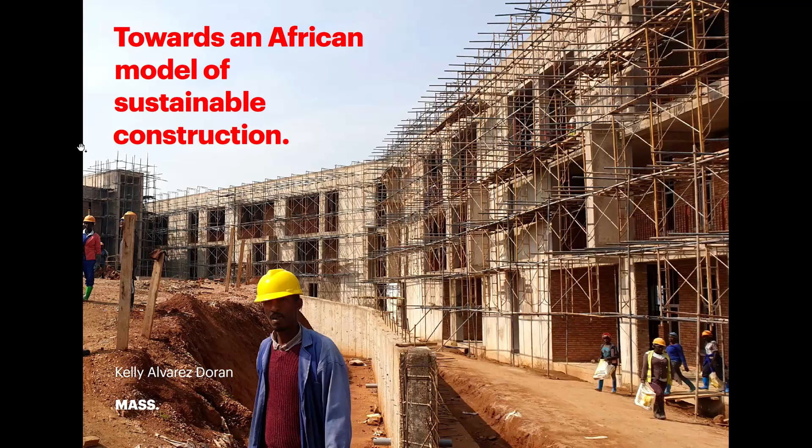Thank you. Just to fill the time, so I'm an architect with Mass Design Group. We're a group of architects and engineers. I think we're, as a discipline, as a construction industry, at a pivotal point in human history. It's fair to say our discipline has a disproportionate impact on the world and our climate through the built environment. Hopefully we can deal with this technicality here.

From the United Nations, this came out just over a year ago: the IPCC looking at this 10-year window we have to halve our emissions as human beings on this planet to make it livable for our children. Never mind this aspiration for zero 30 years down the road in 2050. And for me, this is an existential question, not just for us as humanity, but specifically for us in the construction industry, to be very specific about what it is we're talking about.

Half of what? As a discipline, as an industry, we're responsible for 40% of emissions on this planet. Of that, roughly 30% are related to the operations of the building stock that surround us, that we occupy. And every year, we're adding another 10% of emissions through construction, through the embodied processes of our actions.

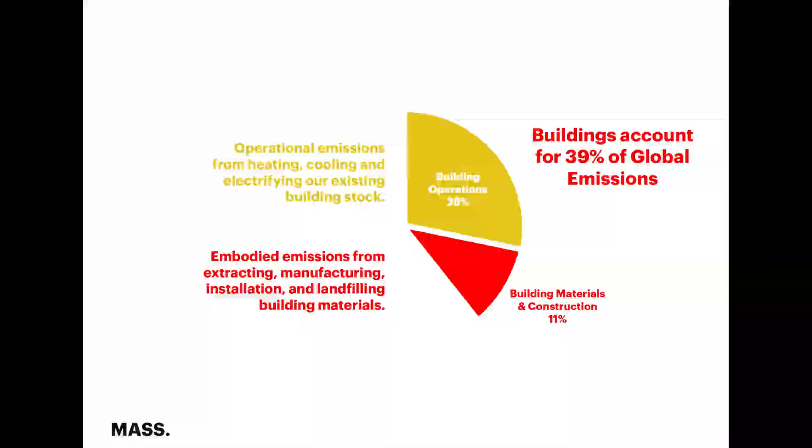And when you look at these two things, by and large, the discipline and the rubric of sustainability has been focused on operational emissions: energy efficiency, heating and cooling, how to reduce our utility bills. Very little in comparison has been focused on the embodied emissions of the process of construction itself. What's in our materials? Where do they come from? What are the emissions related to them?

So this question of half is profound when you think about it. It is the question, I think, of our time. How do we halve the current emissions of our existing building stock, but more importantly, how do we halve the embodied emissions of everything we build from today? This requires a complete systematic rethinking about what it means to be an architect, an engineer, a builder, a developer.

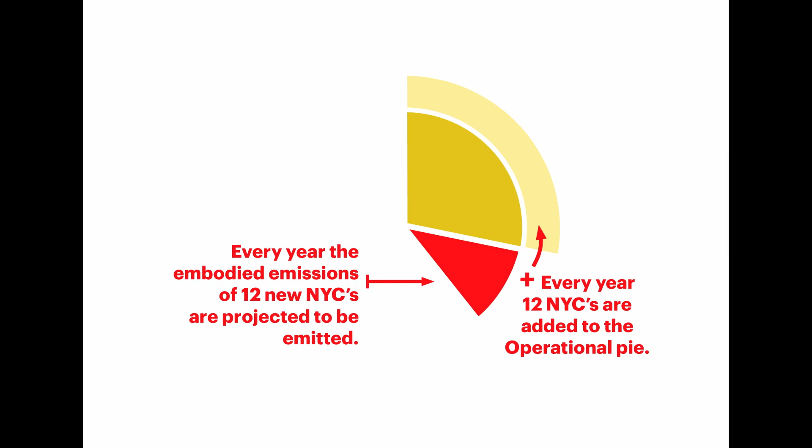Based on the projections from the United Nations for future growth, we are building the equivalent of a New York City every month on this planet. And that is all 5 boroughs, not Manhattan. That much floor area is being built on the planet monthly. So every year, we're building 12 new New York Cities, and that means we're putting 12 New York Cities into the operational part of this pie as well. So it's going to get bigger.

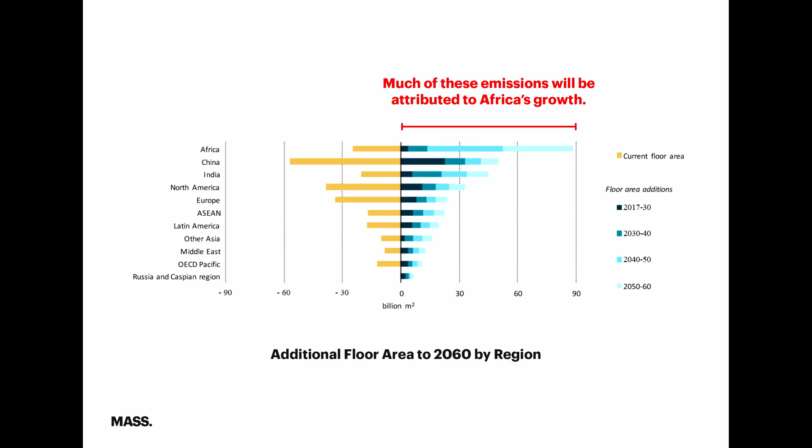As an architect who's been practicing mostly in Africa over the last 5 years, the projections are that this floor area is disproportionately going to happen in the developing context, and a lot of it in Africa. We started 12 years ago in Rwanda. It stands for a model of architecture that serves society. We're a nonprofit of about 130 architects, engineers, filmmakers, from about 14 different countries. We started with the Butaro Hospital in Rwanda, done through a partnership with the Ministry of Health and Partners in Health.

Out of that, we started a fledgling office in Kigali, Rwanda, and in Boston, Massachusetts, and got a couple projects on the back of this hospital. 10 years later, we now have 6 offices across the world. A lot of our work has been in developing settings, a lot in Africa and Southeast Asia, but increasingly we're seeing our model of practice take root in North America and the United States specifically.

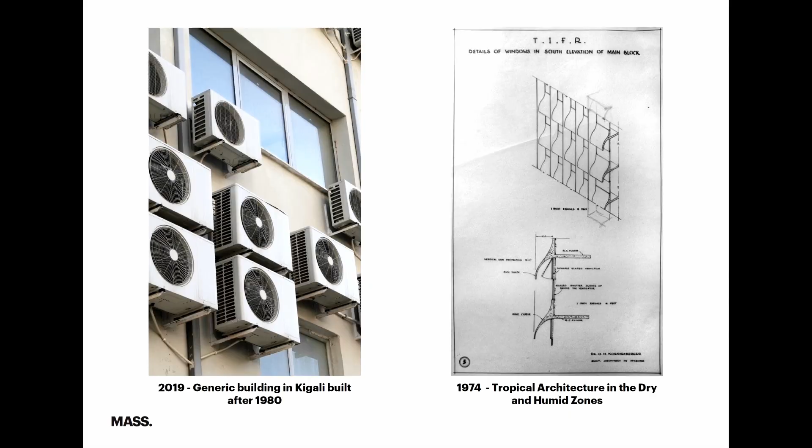So the first is the obvious one, the operational emissions. How do we halve the emissions of a building? This is Kigali, Rwanda. This is a stand-in for most African cities in a way, rapidly growing, a lot of foreign investment and construction, some of it fairly dubious, most of it looking like this image on the left. By and large, a model of architecture that's reliant on mechanical systems. And I think this is not just Rwanda, this is writ large the world. There's not a window in this building open since I've been here, for instance.

On the right, 40 years ago, the Department of Tropical Architecture at the AA in London put out extensive research around design for passive systems for tropical climates, which Kigali is right in, which is how you design a building for orientation and ventilation. I noticed this building over here was thinking about it, which is nice to see.

This basic back to first principles we brought to our first project, this hospital in rural Rwanda, no electricity when we got there, rolling brownouts from even the generator it had, hard to get fuel there, et cetera. How do you design a hospital in a context where electricity is not a given? And so we're back to looking at passive ventilation and the obvious things we know intrinsically. This is intrinsically good design.

Access to views, invert the bed. Every patient has a view of the landscape. Windows open in a hospital, mind-blowing. Cross ventilation, stack effect, all the things that are really core principles of good design that we've largely forgotten in healthcare, or in any typology necessarily.

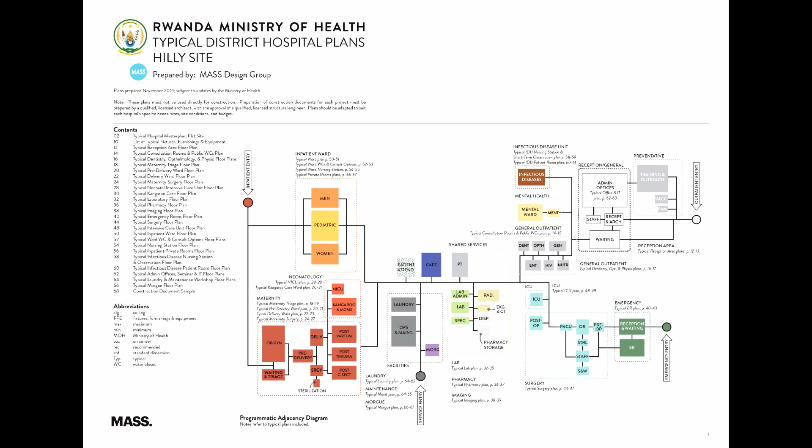But on the back end of the success of this, the Ministry of Health of Rwanda said, great, fantastic job on this hospital. We need like 29 more of them. Can you help us? And so we said, okay, let's work on a template, a set of standards that we can then use for all the different hospitals around the country. So we did these typical plans.

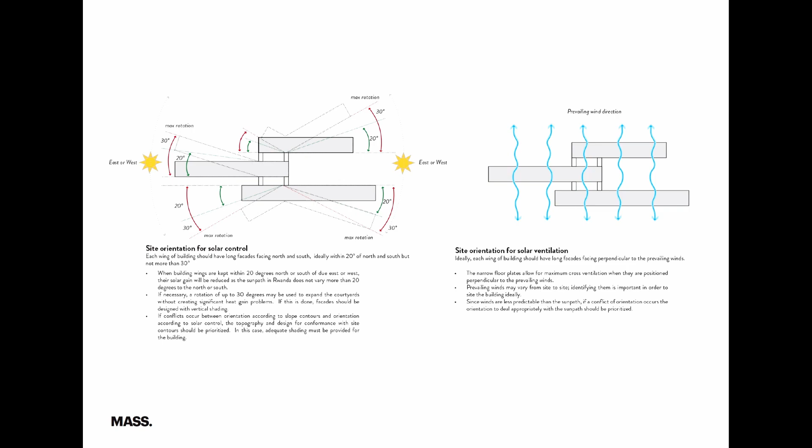And the design of this document was really for their procurement department, the people in their infrastructure team, to evaluate designs that were incoming, to look at their own buildings, to kind of build a basic assessment of environmental design, orientation, ventilation, solar exposure, et cetera, looking at how to get the air changes you need in a ward for making sure

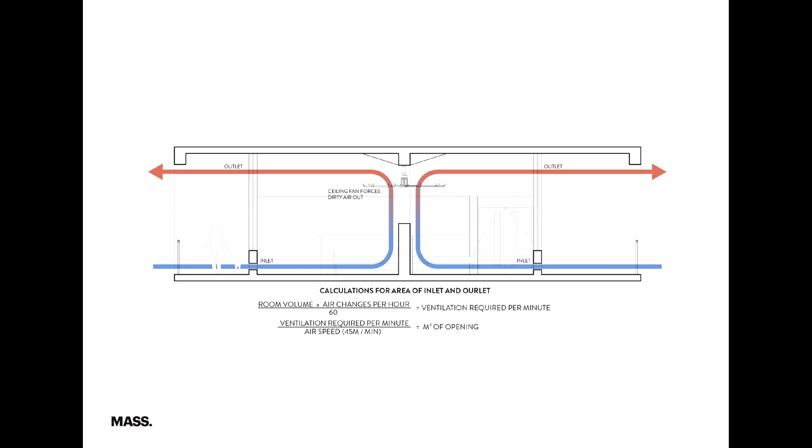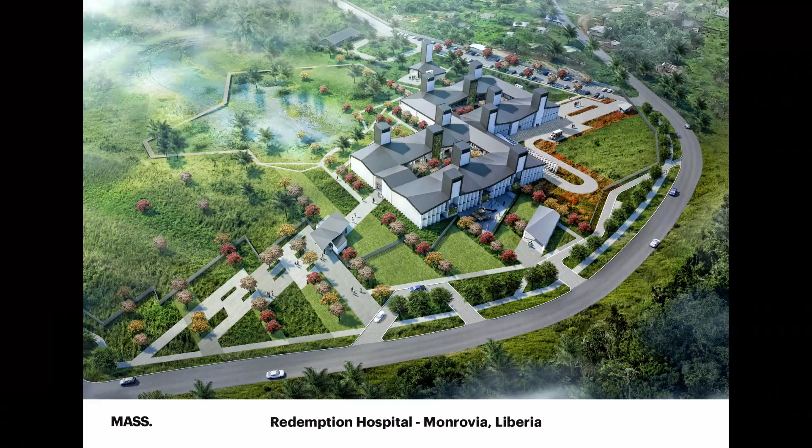We were asked to come to a very different climate, Liberia in Monrovia. Rwanda, elevated, perfect climate, 24 to 30 degrees year round. Liberia, hot, humid, very different climate, and to get the same kind of passive, it required a completely different set of passive strategies to get the air changes required. Again, not a lot of electricity available, very costly.

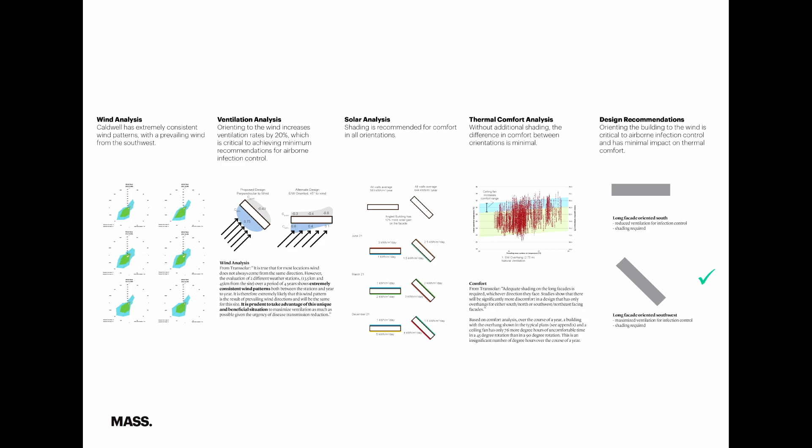So we did a lot of work with Transsolar from Stuttgart around, again, core principles. Where's the wind coming from? What's your diurnal cycle? What's on the site? How does the microclimate affect design, et cetera, to help orient the project. Looking at stack effect, solar chimneys as the principal means to create buoyancy in the building.

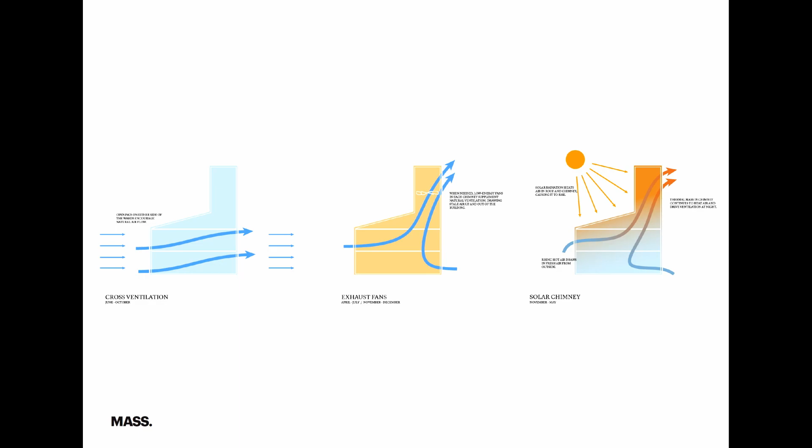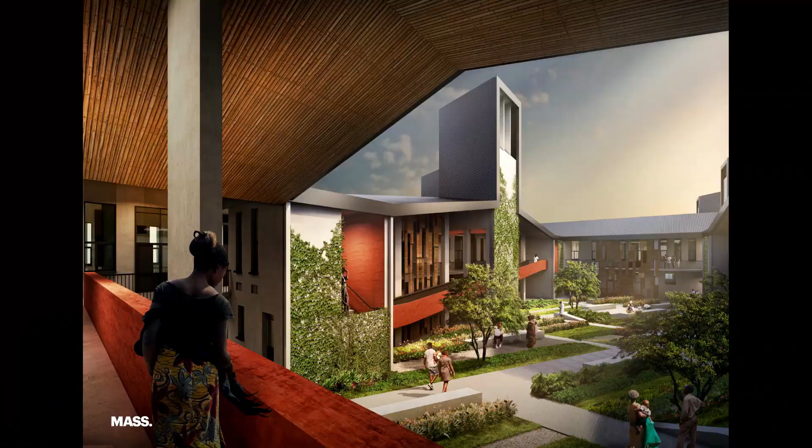In some instances when the wind isn't high enough, doing some fan-assisted ventilation, but for the most part, on a good sunny day, this building is breathing itself. It does not need the kind of life support system that is their HVAC. And this is what it looks like. I think the building systems become the architecture itself, and in themselves, the beauty and the legibility of the project become real.

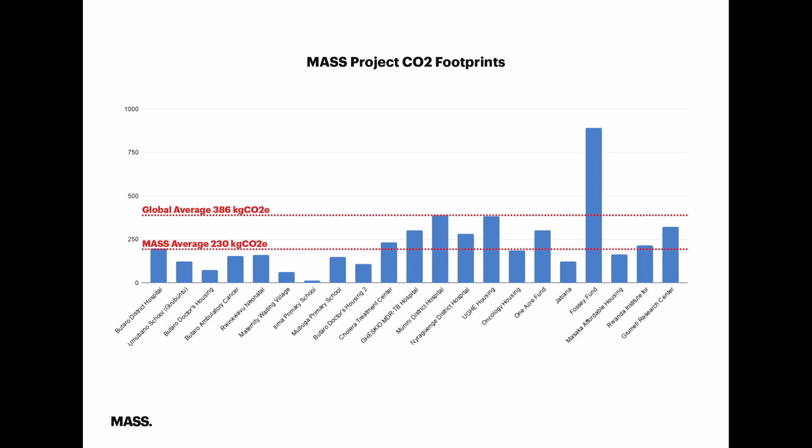On the other side, I think, is our blind spot as architects. We, until recently, didn't even know what this word meant, frankly. I think that's a broad brush statement, but pretty accurate. For the last few years, we've been tracking our projects to understand what is the embodied energy of our projects, how can we improve, to get ourselves some benchmarks internally in the absence of benchmarks in the industry at the moment, certainly in Rwanda.

So you can see this is a kind of global average for construction across typologies. And where our average is, it's not quite half, but it's substantially less, which is something we're happy about. 2 years ago, we opened this project, University of Global Health Equity, a little bit better. Some decisions were made, like using concrete masonry units that I was not a fan of, but we did our best to lower it.

This year, we just opened a couple of weeks ago the Rwanda Institute of Conservation Agriculture, where we're at half. On this project, we intended to get our carbon footprint down as much as possible, and very proud to say we think we're there. So this is how we got there.

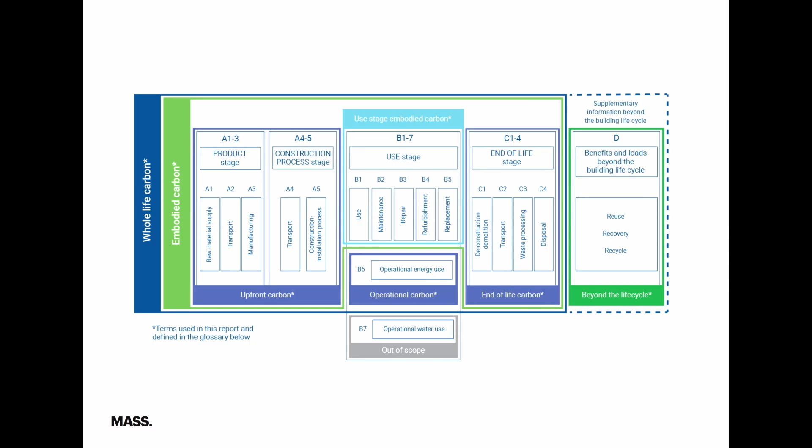This is the emissions matrix of a project, and for the last 30 years, sustainability and LEED has really been focused on this box right here. There's all this other stuff that's really not been paid attention to. It's from the UK Green Building Council, came out a couple weeks ago. And all our decisions as architects from an embodied perspective are up front. They're in the product stage and the construction process stage.

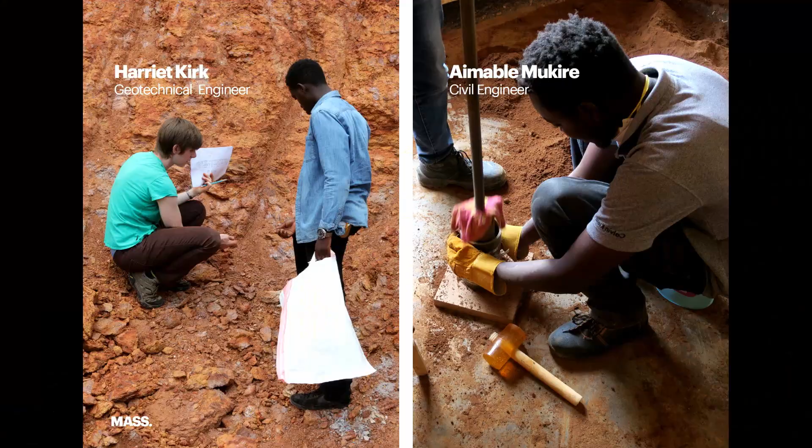So there's zero information whatsoever to even base this on right now. So that's where we're starting. How do we then begin to develop a knowledge to even have this conversation? We do the dirty work. So here's our geotechnical engineer and our civil engineer on this project, going to quarries, getting material, testing things, taking them to the lab.

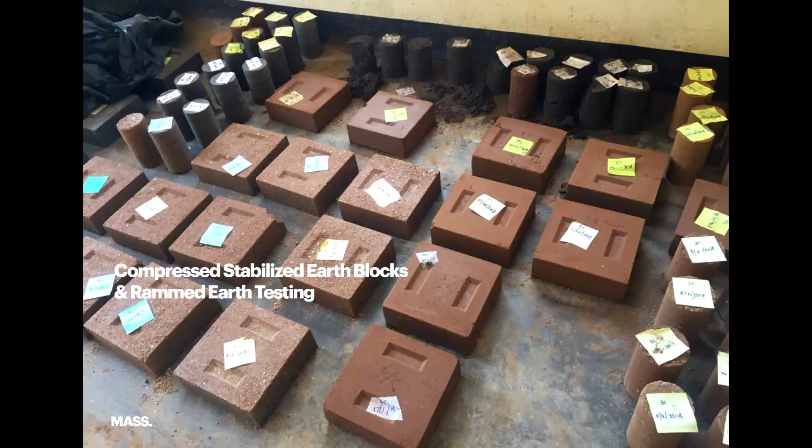The next slide here is all the earth blocks and rammed earth core samples. We took soil from within 10 miles of the site to find the ideal mixes to achieve the strength that we required, right? There's no FSC certified forestry at all in East Africa. So we found a sawmill and we work with them to get certification, to understand what species they have, how they're doing cutting. They don't have a kiln, how do we get them a kiln, et cetera, to kind of build up an industry. As a Canadian, that was second nature to me to use wood.

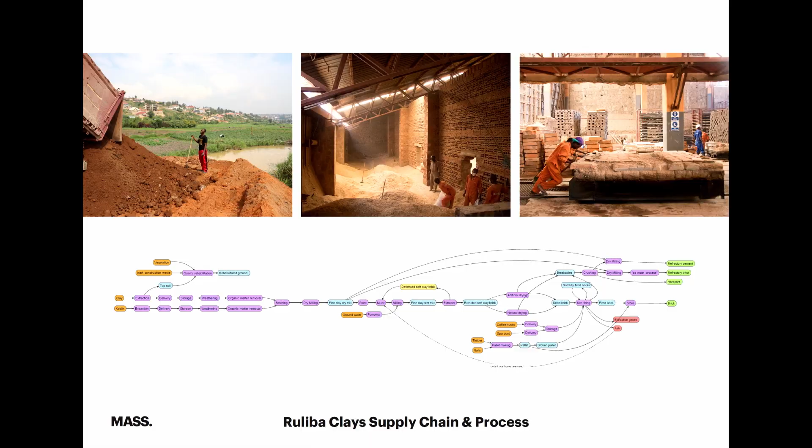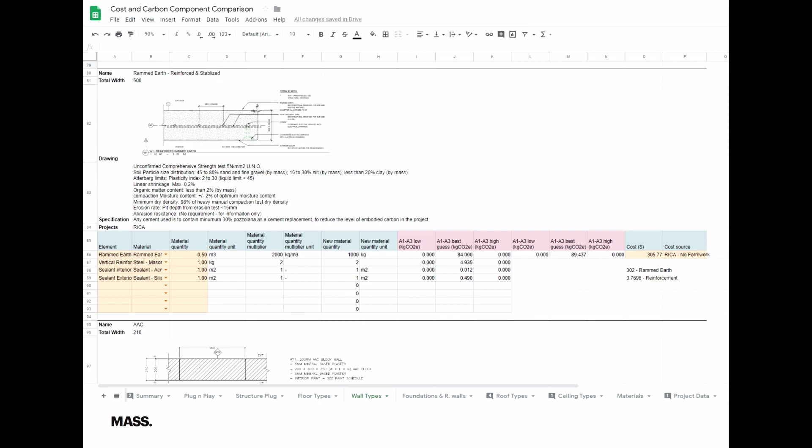On our bricks and roof tiles, we've been working with a local supplier to do an EPD, and this thing at the bottom, which is illegible, is the entire process of making a brick from quarry to kiln and all of the supply chain along the way. These folks use Rwandan coffee husk as their biofuel, which is really great from an emissions perspective, to make their brick. And we've been compiling all this information and basically cribbing our notes as an internal database in absence of any, to inform ourselves, okay, for this rammed earth wall, here's its carbon footprint.

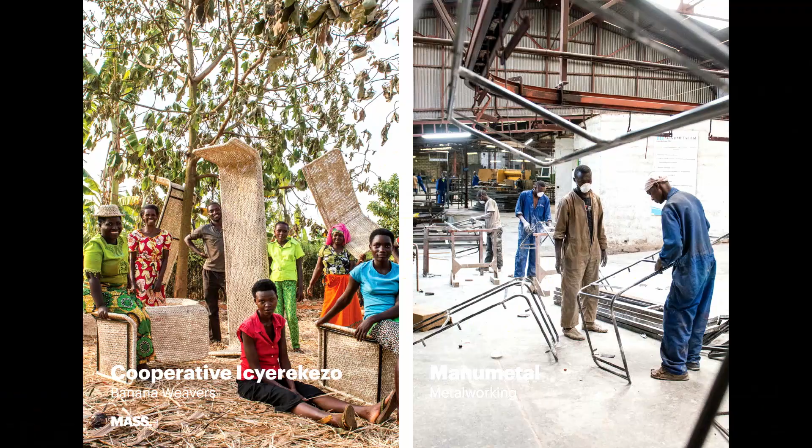It's an agricultural project. Let's use natural agricultural materials. On the left, you can see the banana weavers that we found literally at the end of the road that made the couch backs, and on the right, working with a local metal shop to do the kind of Breuer-esque frames that they wove them into.

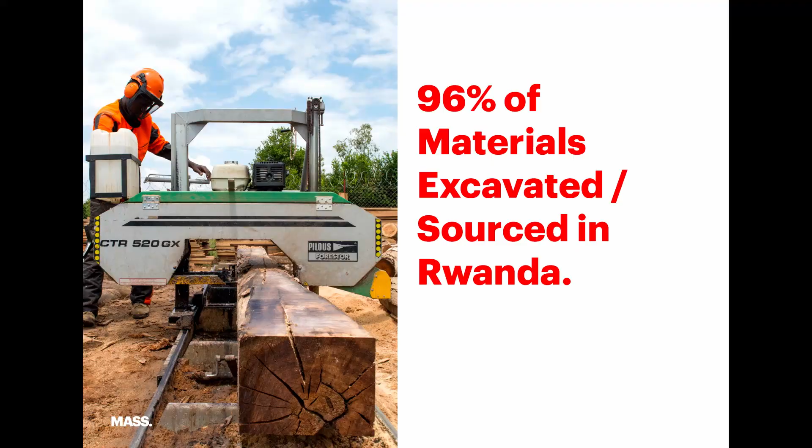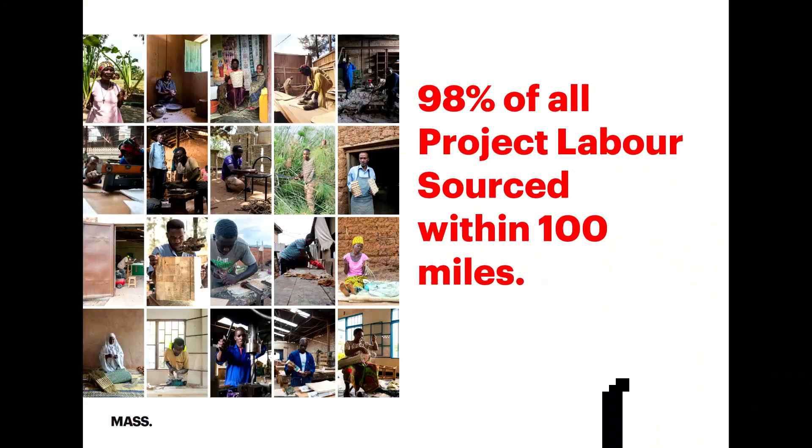Of this project, 96% of all the materials have come from within the country, which is a big deal for a developing nation, which has an 18% VAT on imports. It's good for the project budget and it's good for the country. And on top of that, 98% of all labor for this project has been sourced within the country, and moreover within 100 miles of the project. So there's pictures of the various craftsmen we've been working with on the furniture.

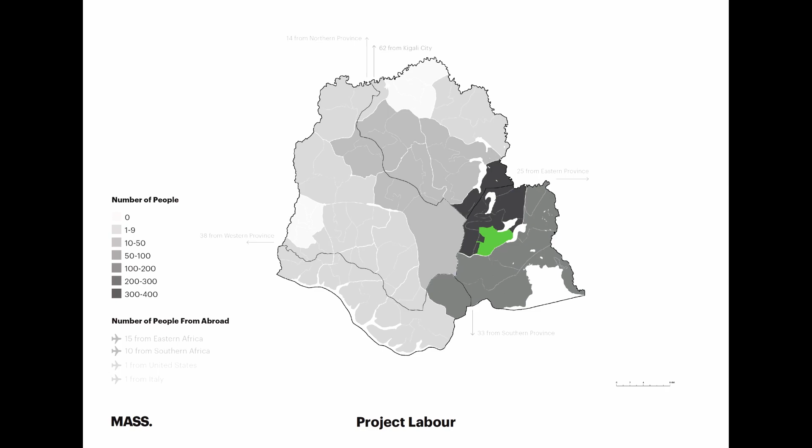But with our contractor, we've asked them to give us their hiring data, and this is the district. The project is this green thing in the district, and at the peak of construction, we have 1,200 people on site, and as I'm told, every able body in the district is currently working on site.

The question I typically get at this point from the audience is, great, you could do this in Rwanda, but it's way too complicated. You could never do it in the UK or Switzerland or any other country here. And this is the question that I'm sure some of you have had in the back of your mind. It's total bullshit. 100 years ago, this is exactly how buildings got built here. And we have migrated so far away from this mode of practice to ultimately be in the position we are now, which was that first slide from the World Economic Forum.

So I've reworked the title that was given to me, and I would say that this is a model towards a new model of construction writ large.